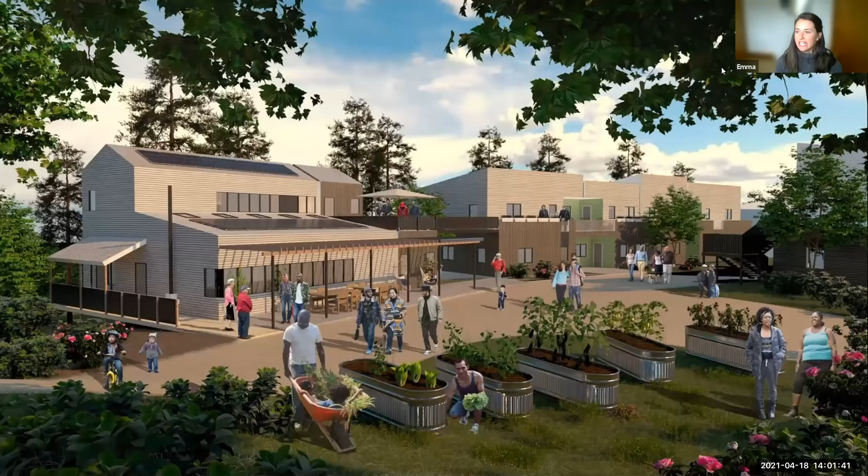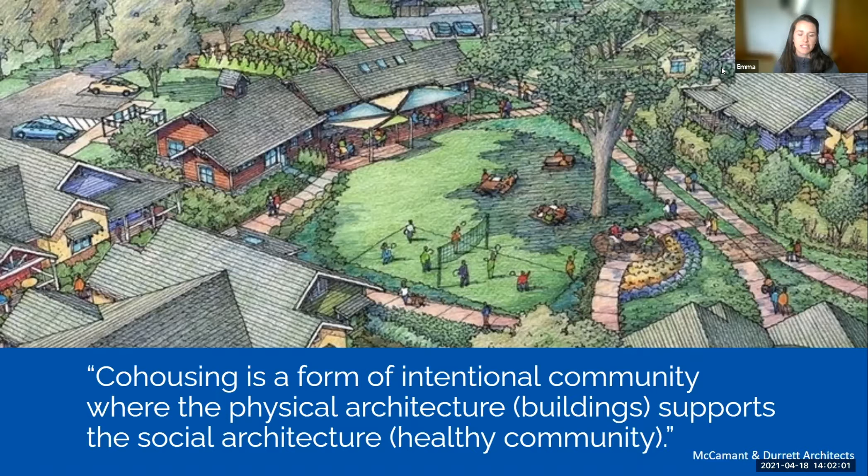So for those of you that are new to co-housing, I'll offer two different co-housing definitions. One can describe co-housing as a form of intentional community where both the physical architecture, the buildings, the built environment, support the social architecture. And that in our minds is this healthy, vibrant neighborhood community.

Another co-houser describes it as a small, safe, old-fashioned neighborhood of modern, energy-saving homes where children can play safely, adults can work things out together, elders have neighbors who care, and where we all work and play together. For Treehouse Village, we have a vision that we're creating a joyful, environmentally responsible, healthy, multi-age community in Bridgewater, Nova Scotia, Canada.

The development of the co-housing community and all of our group decisions are based around and guided by three core values. So we share a value of our planet, and for us that means living lightly on the earth. A core value around our neighbors, and that's building and living in healthy, comfortable homes, and sharing resources and joy and being welcoming to all.

Treehouse Village will be built on the ancestral and unceded territory of the Mi'kmaq people. So we are grateful to be on this land and building here, and we will live in peace and look for means of reconciliation as a community. Treehouse Village will be located in the town of Bridgewater, Nova Scotia. That is a bustling and progressive little town of about 9,000 people. We're about an hour from Halifax, which is Nova Scotia's largest city.

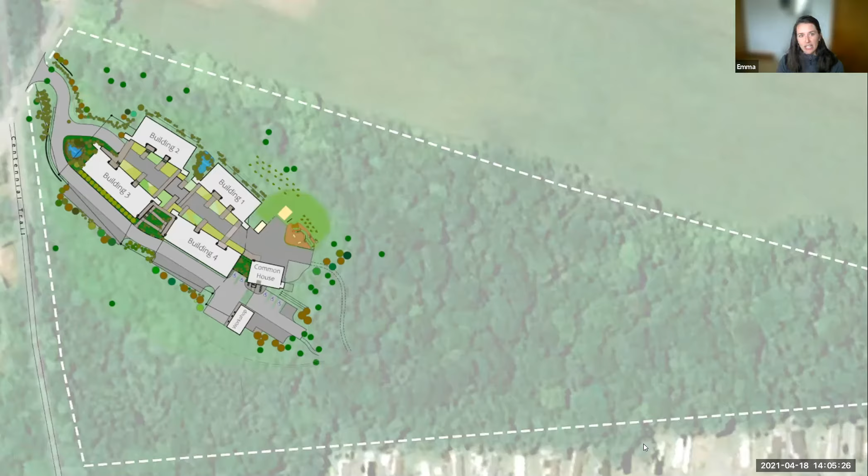So there'll be shared spaces to make food in the kitchen and a large dining area for shared meals. There'll be guest rooms and workout spaces, play spaces, and then this under 1,000 square feet workshop in a separate building for all of the workshop type fun. To zoom in a little bit closer, we'll have a nature playground on site. There'll be lots of room for growing food, and as I said, most of the site will be left forested, so there will be trails on site too.

All of our homes are being built to an ultra energy efficient standard, and that's today's passive house, and that's what we're going to chat a lot more about today. So I'll leave it at that for now. So there's a brief overview of Treehouse to begin with.

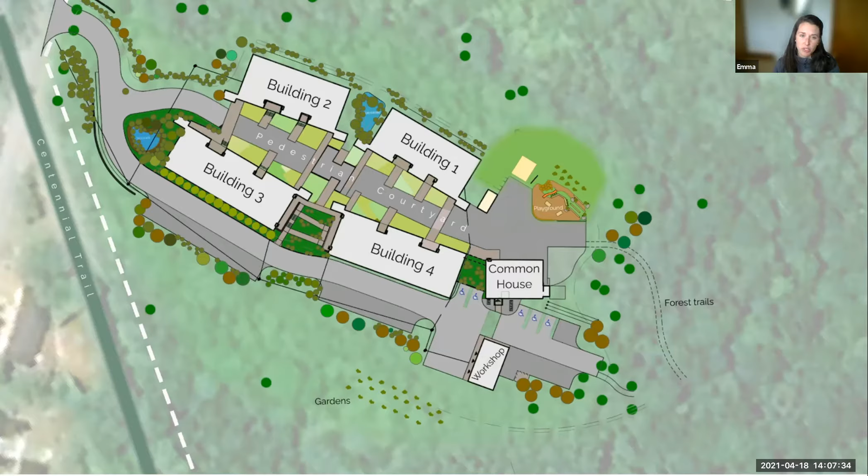Our co-housing community will be incorporated as a condominium once the construction is complete. And that is scheduled to be by the end of 2022, end of next year, we will be moving into our new homes. And to note that the target sale prices for our homes are $300,000 to $500,000. That's including HST. And note that we currently have a pre-sales promotion on until the end of May 31st. And I'll push forward.

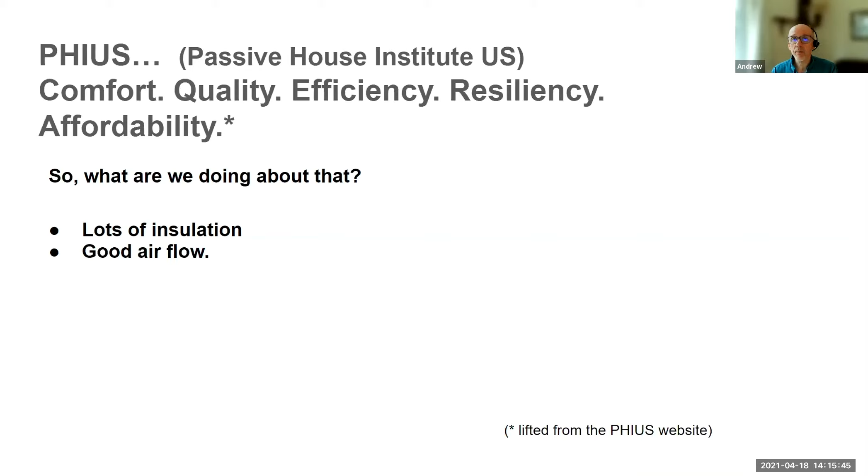So what are we doing? How are we building this to the standard? Well, certainly lots of insulation. Airflow, super important. You need to have lots of good air in order to meet this standard. And clean energy matters as well. For the energy that you use, they care about how you generate that. Oh, there we go. Okay, there are a few more details.

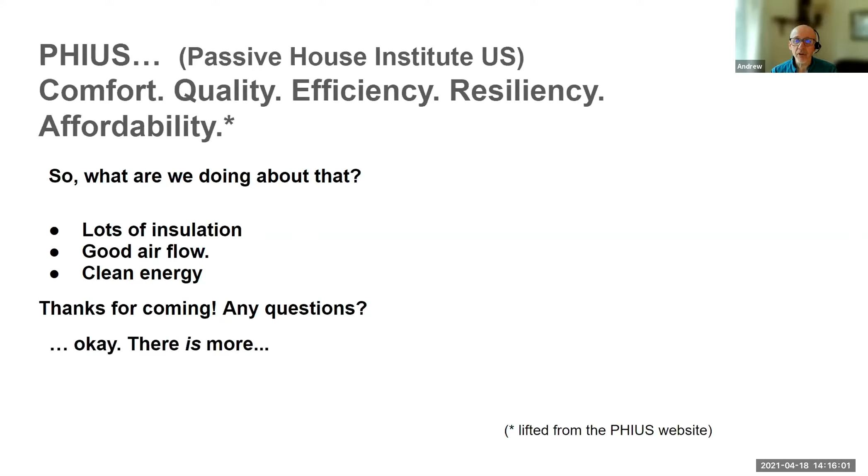Let's start with the first one, insulation, because that's how you stay warm. And we begin below the slab. Two of our buildings on the uphill will be slab on grade. The two downhill will have basements under, one for parking, one for general storage. But below those slabs and below the floors above basements, we're going to put in R40 of insulation. The code would be about R10. Don't hold me to that, I just did a quick look up on Google this morning, but from what I could find, yeah.

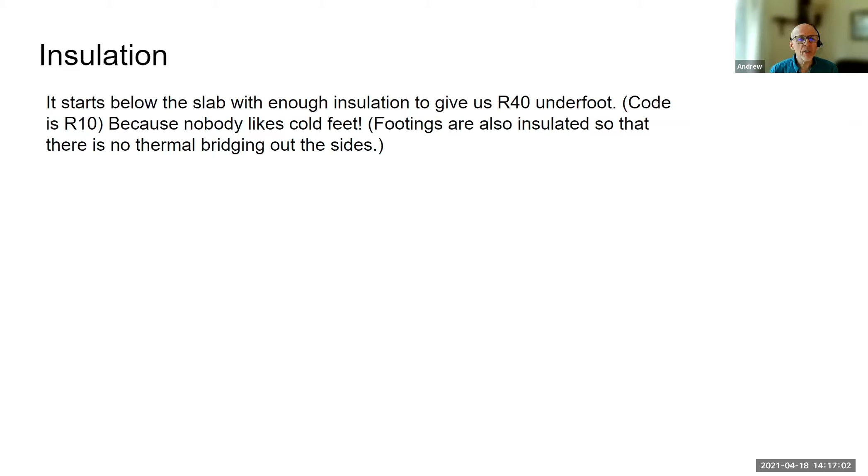I've been in these houses and they do have cold floors. We're not going to have cold feet; we are going to keep our toes warm. We're also going to make sure that the footings are insulated on the outside to avoid thermal bridging, which is a super important concept and one where a lot of code-built houses really fall down. The roofs, we're building those to R92. Code would be maybe 30 or 40 these days, versus 92. We are planning to keep the heat on the inside.

Walls, those have been a bit tricky. So where we began with the wall design, we had a double stack of 2x6. They were staggered, so we did not have the thermal bridging. And that was going to be 2 different layers of insulation there, a bit of modeling to make sure that there wasn't going to be any condensation within the walls. Actually, the modeling caught a mistake and we managed to fix that.

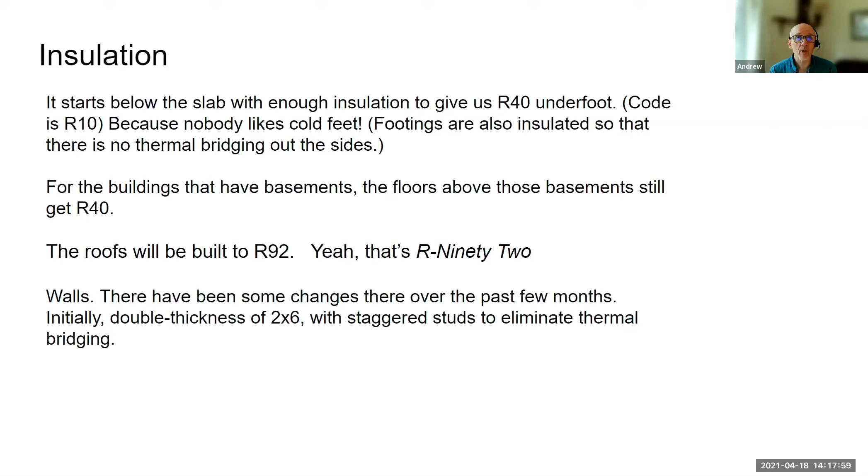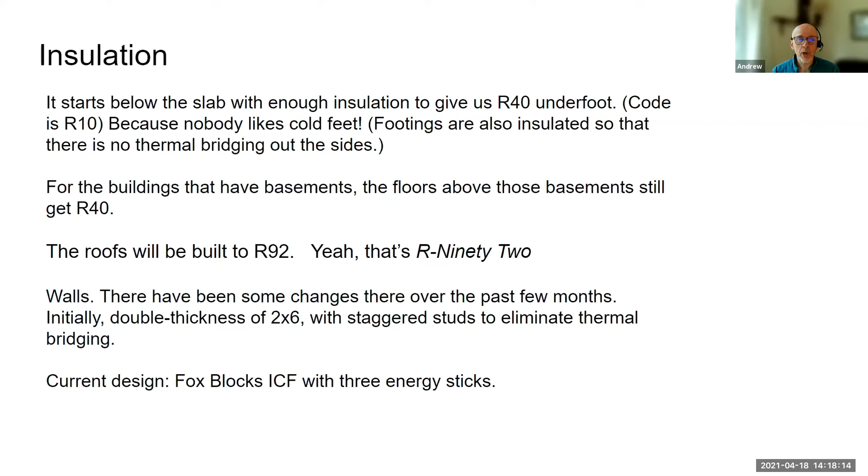However, this is the 2nd year of the pandemic, and you all know what's going on with the building industry. We don't own enough Bitcoin in order to afford spruce studs. So we had to switch over to a current design, which is Fox Blocks ICF with 3 energy sticks. You might be wondering, what did he just say? All right. What that's all about is ICF means insulating concrete forms.

And I've got a little image here. You can see a wall going up built of them. And there's a detail here, 2 layers of insulation, the core, filled with reinforcing that's both plastic and metal. So there is a super strong structure. That gets filled up with concrete. The energy stick that I mentioned is extra layers of insulation that you put inside that.

Why inside, not outside? Well, this stuff you've got on the inside to hold it all together, you want to make sure that those reach right out to the outer level of the insulation, partly to hold it all together, and partly so you've got something to hang your walls on, both inside and outside, so that you've got something that looks like not just foam. Anyway, the energy sticks go on the inside.

They all go on the outer side of the concrete, which means you've also got thermal mass relatively close to the living space. So the idea is going to be that you've got a little bit of insulation, then you hit the concrete. Over time, that will warm up. And that's going to give you a really good buffer on temperature so that you're not going to get big swings. On the outside of that, we've got lots of insulation. So total R value, 48.

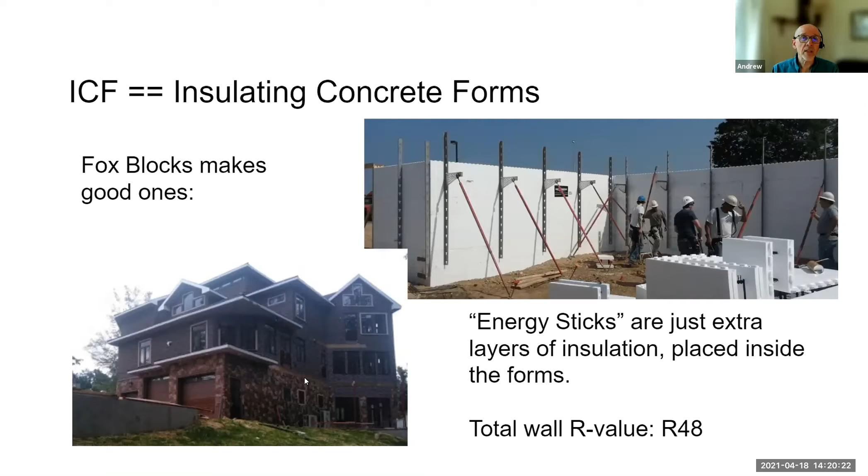Windows, super important detail. Triple glazed, PHIUS certified. We're going with casements. We've had a few people saying, no, we'd rather have double hung. But the trouble with double hung is really, it's incredibly difficult to get them and keep them in a state where you don't have air leakage at that junction between the two pieces of glass, or the two parts of the window that slide past each other.

By going with casement, and we are actually exploring tilt and turn for some of the windows, just an exploration right now, that gives you a solid, effective seal so that you don't get that air leakage around the window. We're also going to make really, really sure that we don't have thermal bridging around the edges of the windows or anywhere at all close to the windows.

Also minimize the air leaks there, which, I don't know, have you ever noticed on a cold winter day, when you've got condensation forming on your windows, it always forms not across the whole window evenly. It starts out at that bottom edge, goes up the sides, it's coming in from the edges. That's happening because the edge of your window is touching something cold. And the coldness is hitting the glass, cooling it first, and that's where you're starting to get your condensation.

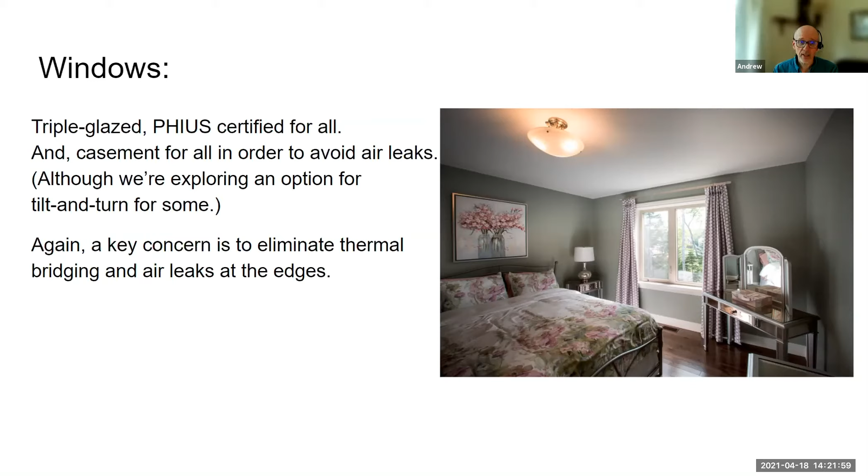So the condensation is telling you you've got a flaw in your design. We're avoiding that. We're making sure we don't have that thermal bridging. We're making sure we don't have those air leaks. And continuing on about those air leaks. So absolutely, you need to avoid them. And as my slide says, it's not just the cold air. The worst thing about the air leaks is the condensation that they cause.

And you'd see that if you crack open a window, or if you've got a double hung window, maybe you've got a door to the outside and it's got one of those sliding windows in it. Okay, you notice right above the junction in the middle of the window, how it always kind of turns a little dark there. That's your mold growing because you've got an air leakage coming in, hitting the lovely moist air in your home, causes condensation, causes mold, causes rot. We need to avoid that.

So what we're going to do is, all right, great construction should avoid most of that just off the bat. But construction, there's always going to be something that goes a little wrong, somebody's not careful enough.

So once all the structure is built, and before we put in any of the finish work, we're going to bring in AeroBarrier, which is essentially what you do is you depressurize the living space. Sorry, not depressurize, you pressurize it. So you get super high pressure inside that, squeezing out through every single possible crack.

And then you spray in the AeroBarrier compound, which, this is not the technical term for it, the magic goop, which is basically suspended in the air, which is heading out through all the cracks. This stuff lands on the edges of those cracks, it sticks, it builds up, and just like your high cholesterol diet, clogs the flow and stops the flow. So that should take care of all of the leakage, and therefore no condensation, no air leaks, no mold, no rot.

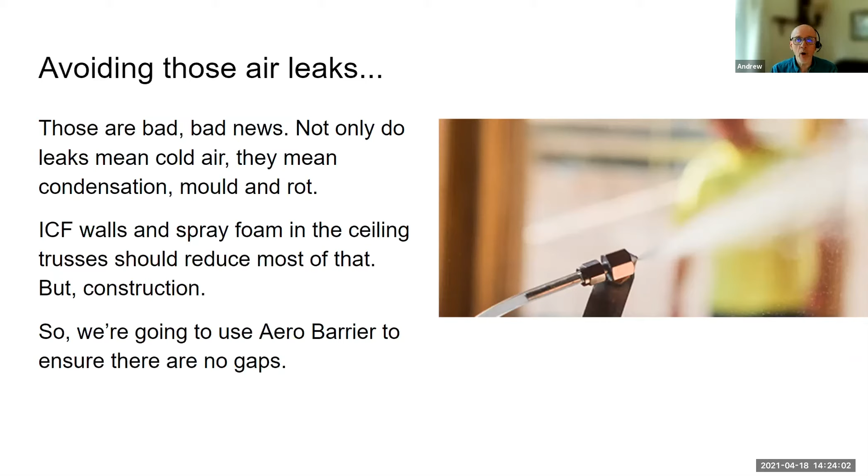All right, what about breathing? Everyone says, well, wait a second, this is why we'll have our 100-year-old homes. They breathe. Yes, they do. But you throw in a vapor barrier, throw in a few other things. 100-year-old homes are good, but you need a lot of heat to keep them warm. Try to keep them warm with modern standards, and all of a sudden you've got those condensation problems.

So what we're doing instead is bringing in energy recovery ventilators, really good ones. PHIUS certified, not heat, energy recovery ventilators. Those will have filters, so you've got nice clean air. They will capture most of your heat, but they will get rid of the stale air. They'll get rid of your smelly sock odor. They will get rid of your cooking odors. And when you've got a shower or you're boiling up some pasta, flip a little switch, dumps out the super moist air, keeps the inside nice and fresh.

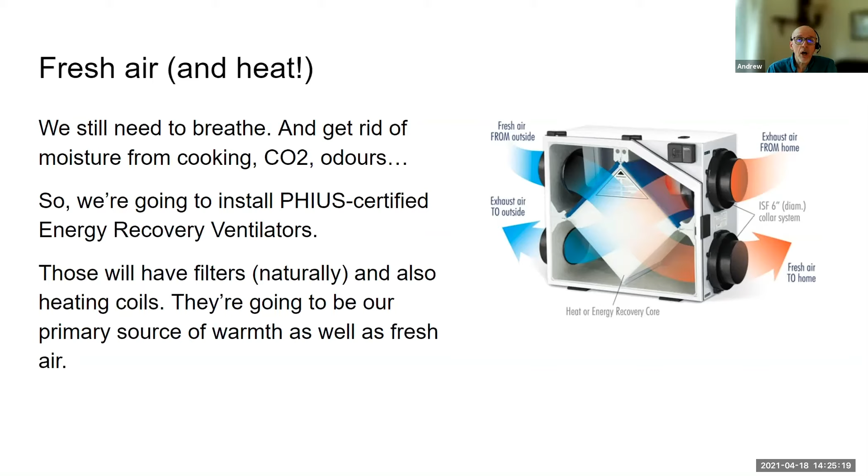The other thing about these is that they will contain our primary heat source. There will be simply a heating unit inside those to give us all the heat we need. And no, it's not going to be very big. In fact, more about that. So we did some analysis on this. With these small heating coils just in the energy recovery ventilators, we did some calculations and we found that some of the units, not all of the units, but some would need a bit more heat on your coldest winter days. 700 watts. I mean, seriously, that's a 1500 watt heater that I've got a picture of there, right? So, but yeah, we need those extra 700 watts.

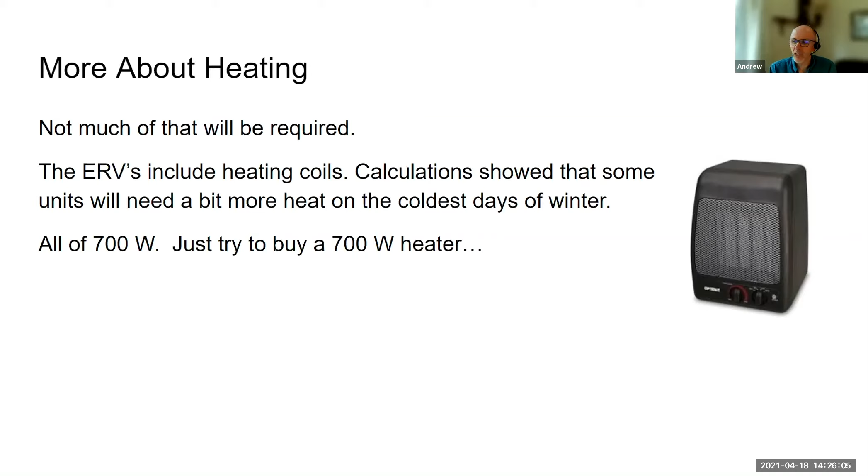What are we going to do? Well, we could have said, all right, go buy yourself one of those things. Cheap solution, but can you do that really? Hey, you're going to have to go buy a ceramic heater in order to stay warm. No. Put in baseboard heating. Oh, those are horrible. No. We decided in-floor heat for the bathrooms and the entryways. All right, come on. Who doesn't want in-floor heat in their bathroom?

So that will cover the energy deficit on the cold days, gives you that extra little bit. And sure, you just turn down the heat at the ERV if you'd rather go with heat coming from the floor. So you keep that balanced. But that gives us a really cozy solution. And you don't have to tell people, no, you're going to have one ceramic block heater.

Cooling. The design will include the ability to install that if required. We're betting that nobody's going to require it, but just in case we're wrong, we are anticipating global warming might not stop immediately. So just in case, the option will be there. It will absolutely be possible to retrofit and add in your cooling. But let's wait and see. We're not that far from the Atlantic Ocean. Should be able to stay cool. Plus, that's another advantage of our PHIUS design. All of that insulation keeps the heat out.

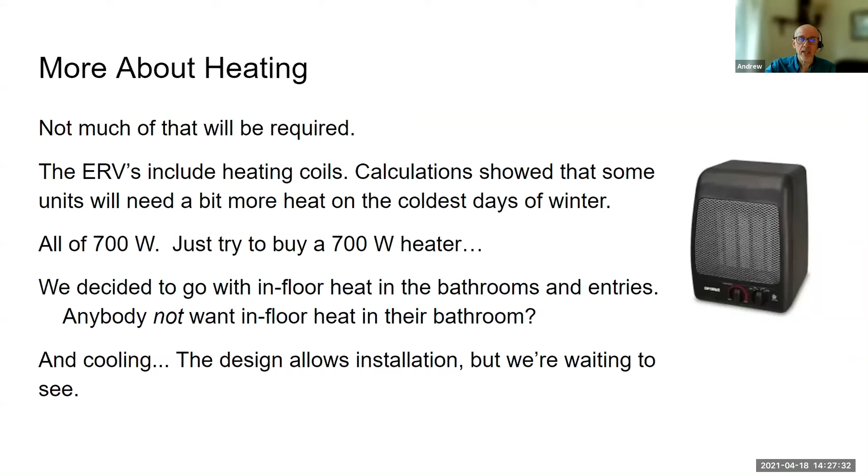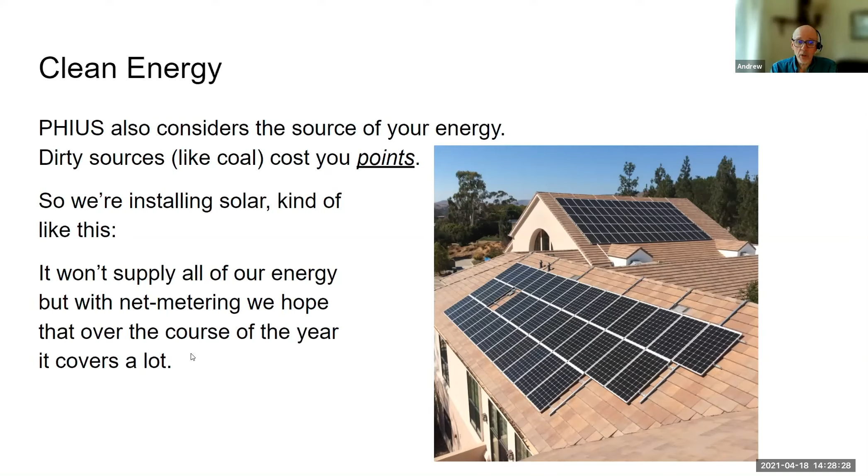And that bit about points that was emphasized. Well, this comes back to why we're doing PHIUS. There's a lot of modeling upfront to ensure the design meets specifications, so we don't guess. We make sure that the specifications are right. That saved us a lot of money on the installation of the heating, because otherwise our engineer was going to have to go with code minimum, which would have required the installation of much more expensive units. So by going with PHIUS, we avoided that cost.

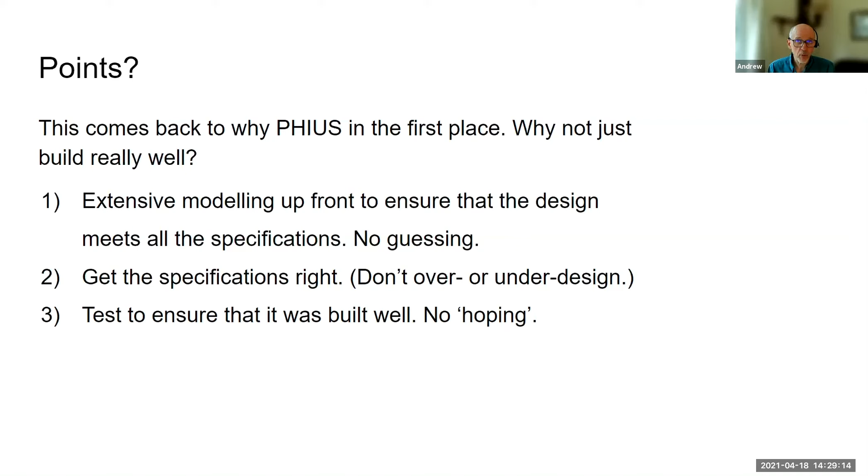And it also requires testing to make sure that it was done right. There's no hoping that they got it right. It'll be tested, flaws will be fixed, and it will be right. And the result is going to be healthy, cozy homes that should last 100 years easily and just keep on going.

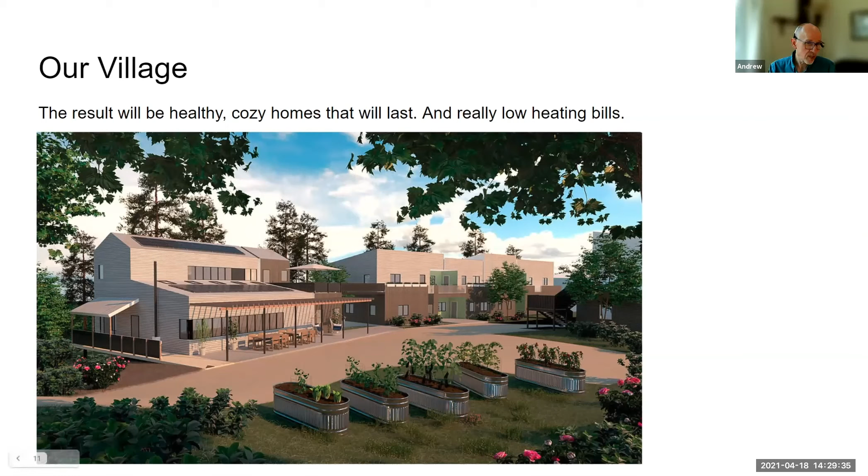I have a question for Leon. So Leon, like you mentioned, your family is the founders of Treehouse Village, and you started this project seeking out housing that reflected your values. So how do you see Treehouse Village and Passive House being this next generation of housing?

Yeah, it's tough. Nova Scotia has really limited options for housing, and new homes are generally built to code minimum, and there's an industry here that's not used to building highly energy efficient homes. So if your family really values living lightly on the earth, really minimizing your energy costs, or even being net zero, where you're producing as much energy as you're using, how do you do that? How do you find that kind of housing in this area?

And for us, we couldn't find it. It wasn't there on the market. And so you've generally got two options. Either you can just not care about that, or you can go through the expense and effort of building a home from scratch by yourself with your family. And that means navigating all of these technical requirements, having these professionals work just for you to do designs and things like that, or DIYing it and doing it yourself. And those things were neither affordable for us nor options.